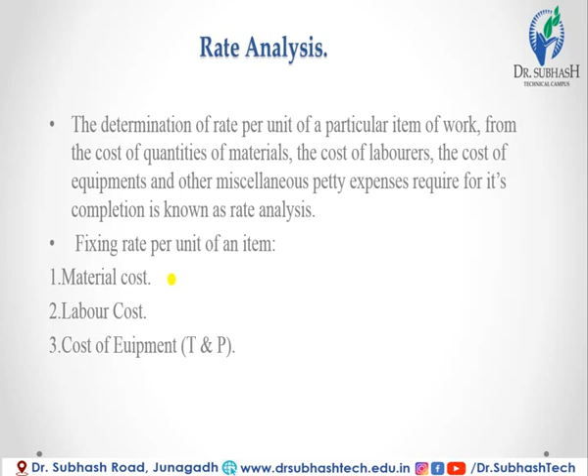Okay, so in this slide we have to discuss the definition of rate analysis and fixing rate per unit of an item. 3 points are considered here. First point is material cost, second one is labor cost and third one is cost of equipment, यानी कि tools and plant. In next slide we have to discuss in detail the purpose and importance of rate analysis.

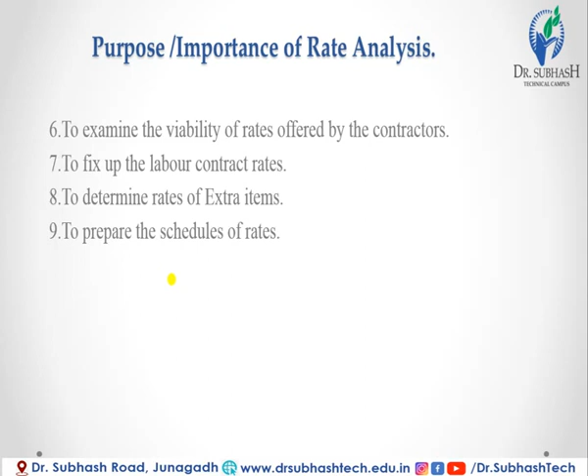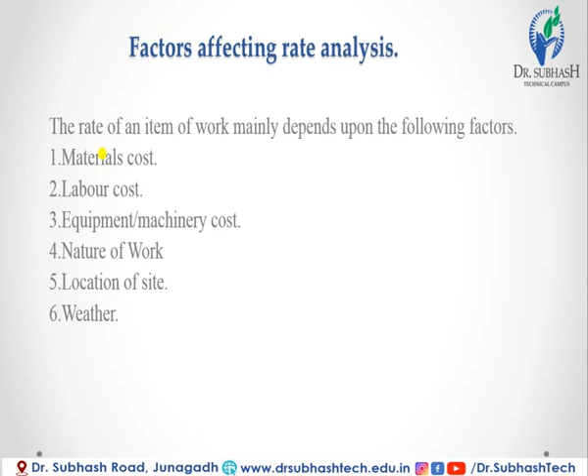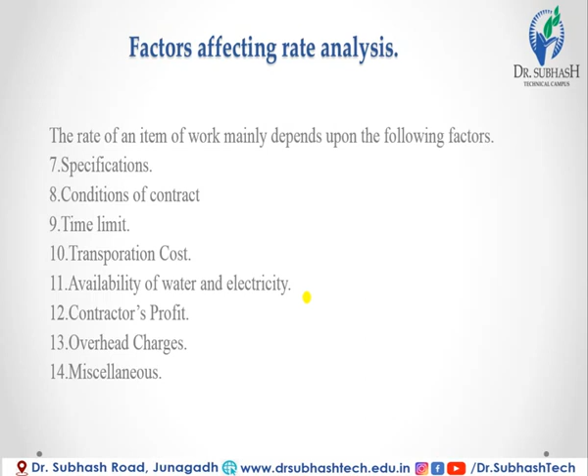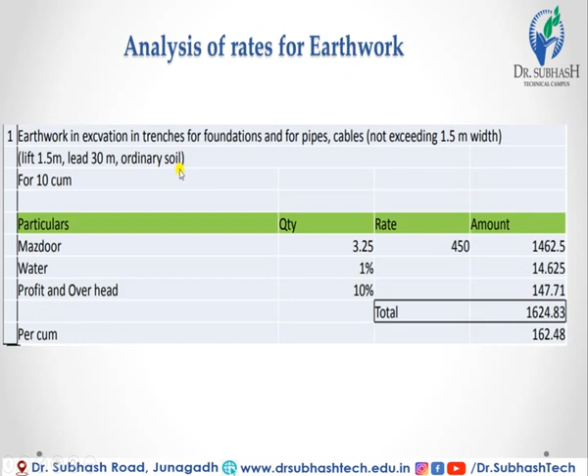162.48. So in the next slide we discuss earthwork in excavation in trenches for foundations and cables not exceeding 1.5 meter width. In the first case we considered ordinary soil; in the second we consider dense soil. So for 10 cubic meters, particulars in the first column, quantity in the second, rate in the third, and amount in the fourth.

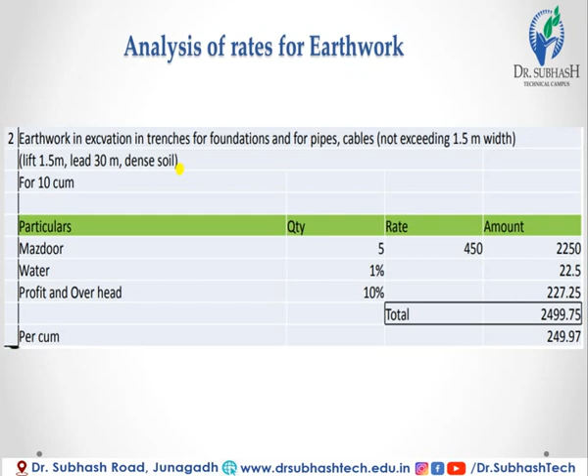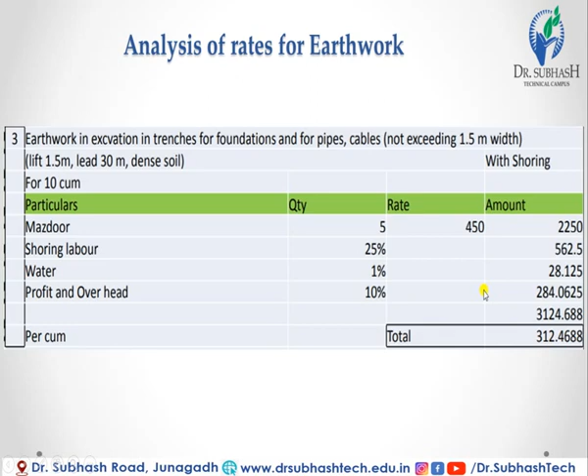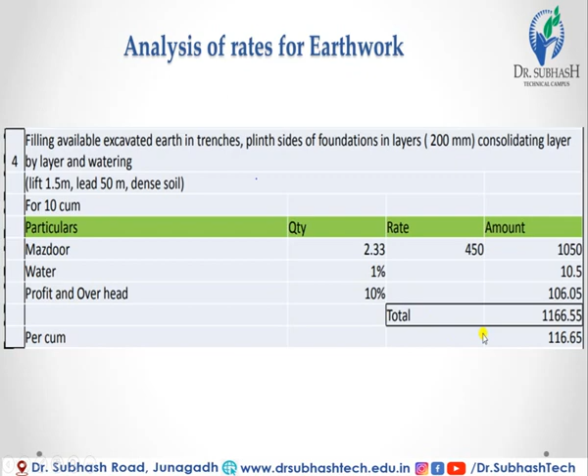116.65. So fifth activity is filling in plinth with local sand under floors including ramming, consolidating and dressing complete.

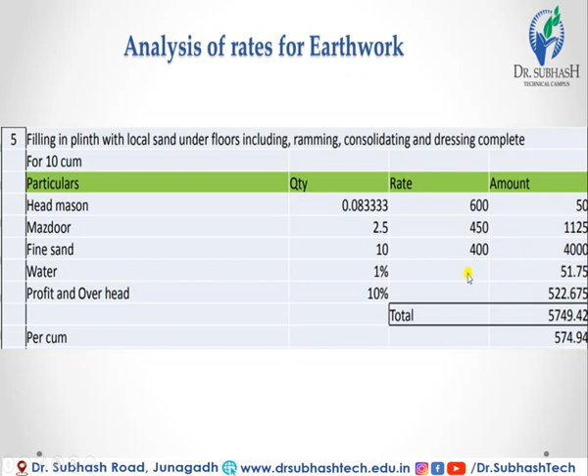574.94. So sixth activity is one brick layer flat soling, joints filled with local sand, for 10 square meter. Particulars quantity rate and amount: for mason quantity 0.8 and its rate per day is 600. So 600 multiplied by 0.8, amount is 480. Mazdoor 1.6, rate is 450 and amount is 720.

So bricks quantity 1500, rate 6.4. So total amount in bricks 9600. Sand is 0.373, rate is 400, so 149.2. Contingency lump sum 0.5% considered and the amount is 54.746. Water 1% taken and rate is 110.03, and profit and overhead considered 10%, so

1111.399. So total cost that may arise in the one brick layer flat soling with joints filled with local sand is 12,225.38 and per square meter

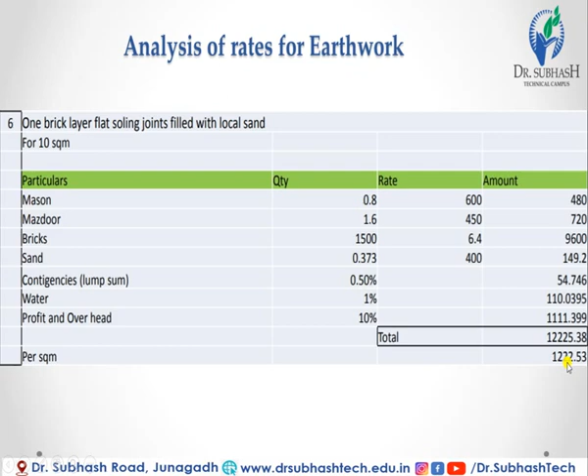1,222.53. So 7th activity is analysis of rates for cement concrete 1:4:8 with graded stone ballast 40 mm down in foundation. Particulars quantity rate amount: head mason 0.25 quantity, rate is 800, so 800 multiplied by 0.25, amount is 200. Second is mason, quantity is 2 and rate is 600, so 600 multiplied by 2 is 1200.

Mazdoor 20 quantity, rate is 450, so 450 multiplied by 20 is 9000. Stone ballast 9.6, rate 1200, 11520. Sand 4.8, 400, 1920. Cement is 35 quantity and rate is 350, so 12,250. Contingency lump sum 0.5%,

180.45. Water considered as 1% and rate is 360.70. Profit and overhead 10%, 3,663.11. So total cost is 40,294.27 for 10 cubic meter, and if we consider 1 cubic meter, total cost is

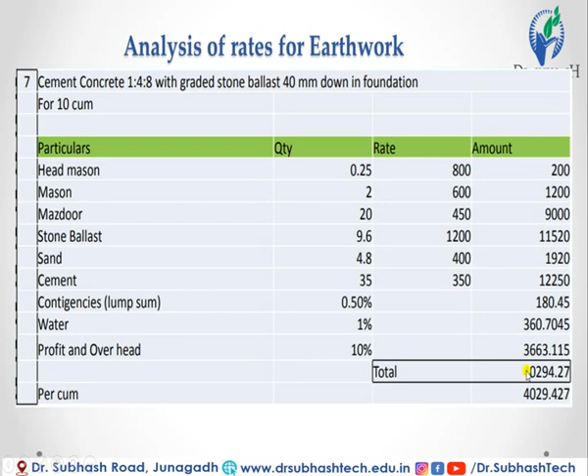4,029.42. In next slide we have to discuss cement concrete 1:2:4 with graded stone chips 20 mm down for RCC works, excluding shuttering and reinforcement, for 10 cubic meter. So particulars: different labors as well as materials, quantity, rate, amount.

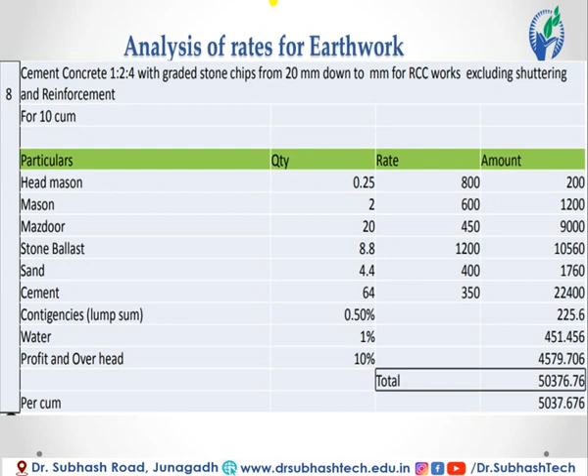5,037.67. Okay, so for analysis of rates for earthwork, we have to consider 8 different activities, 8 different conditions. So this video session is completed here, the first lecture, and in this lecture we talked about what